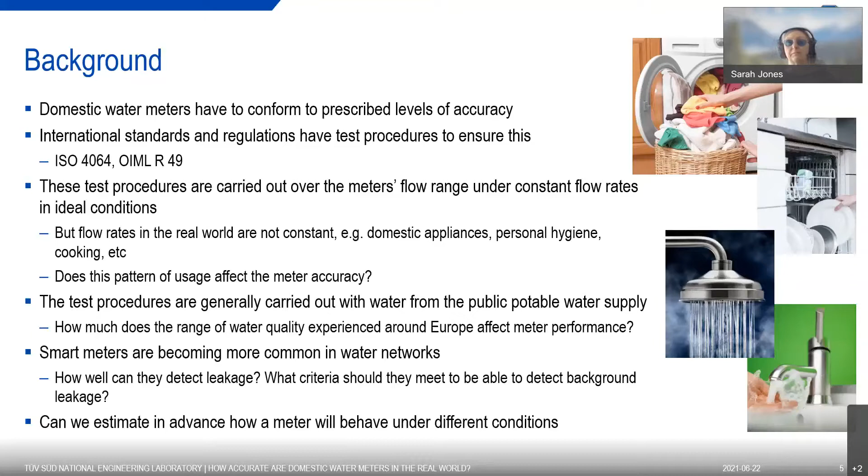To answer these questions, they set up an EMPIR-funded project, MetroWaMet, Metrology for Real-World Domestic Water Metering. The project aims at establishing a metrological infrastructure to characterize domestic water meter performance at close to real-world conditions, and not at laboratory conditions as is done presently.

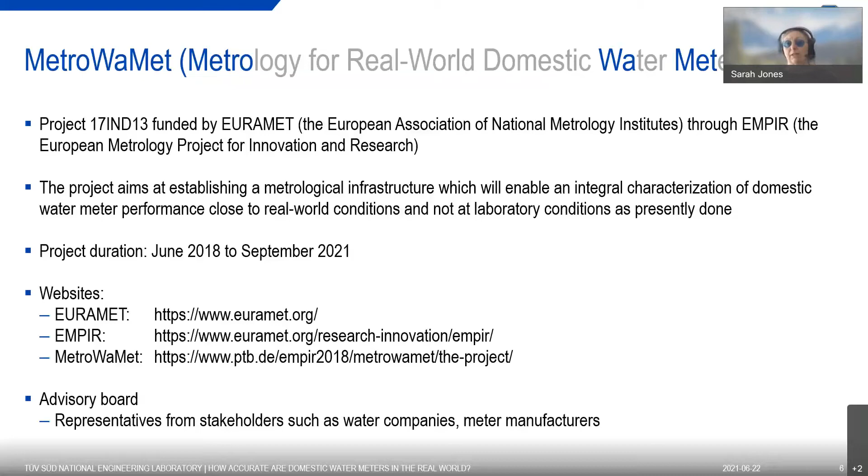The project duration is from June 2018 to September this year. It was due to finish in May, but due to COVID, it's been extended by a few months. There's details of the EMPIR and MetroWaMet websites here if you want to look at those in more detail. The project also includes an advisory board with representatives from various stakeholders, manufacturers and users.

The participants of this project come from all around Europe. There's NEL from where I work up in Scotland, PTB and DVGW in Germany, CETIAT in France, BEV-PTP in Austria, UNISA in Italy, TÜBİTAK in Turkey, CMI in the Czech Republic, DTI and Force in Denmark, VTT in Finland, and RISE in Sweden.

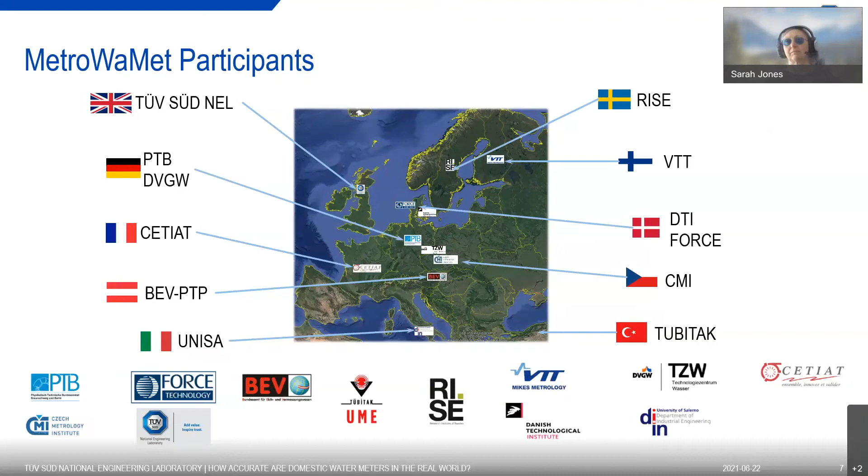The project was split into a number of work packages, which I will describe in the following sections. Work package 1 looked at whether dynamically changing flows affect meter accuracy. Experimental facilities were set up to test this at national metrology institutes and designated institutes in several countries.

A pilot study of the EURAMET interlaboratory comparison was undertaken to validate the metrological comparability of the dynamic test facilities. This was to ensure that the dynamic flow profile capability of all the dynamic test rigs was the same. To test this, a transfer standard, also called a validation module, was circulated around all the laboratories and recorded how well the facilities matched the dynamic test profiles.

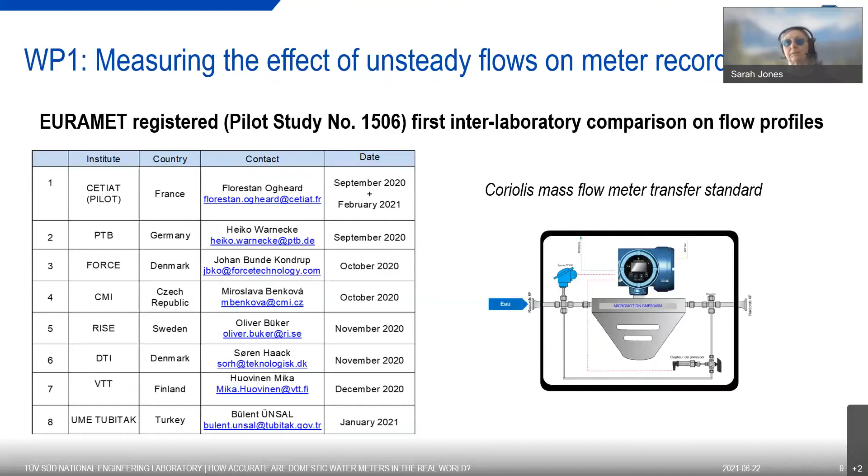This slide gives a few more details of the system. Basically, it was all in a shipping-friendly package with dedicated software that was sent around the various labs to measure the performance of the test rigs.

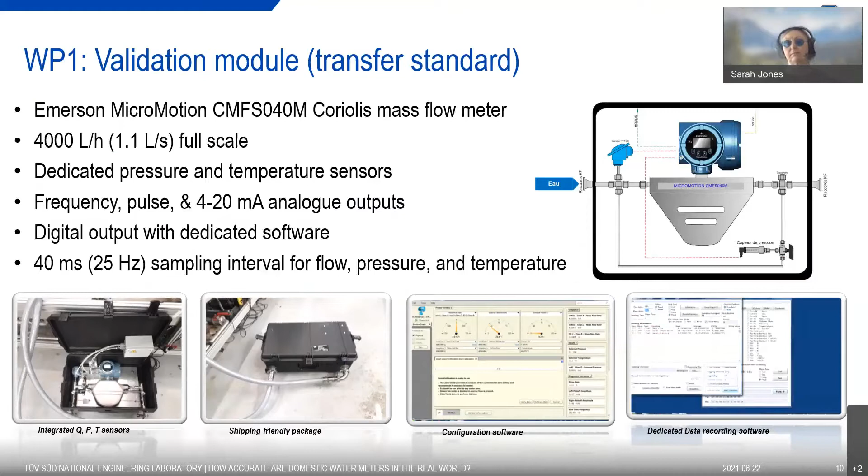The pilot study was performed with 3 flow profiles with different volumes of approximately 50, 80, and 100 litres, simulating dynamic flow load changes and flow rate range up to 1600 litres an hour, which is 1.6 meters cubed an hour, and flow durations down to 10 seconds.

The selected flow profiles were determined on the basis of previous studies of consumption data from various apartments and apartment buildings in a number of EU countries. These data were evaluated in relation to flow rates, their durations, and speed of flow changes.

The flow profiles were chosen with respect to the laboratory's capabilities, and so that the flow profiles are statistically representative of the actual water consumption in households. Each flow profile represents a different situation for which the participating laboratory had to demonstrate its capacity to handle different flow profiles.

So for profile number 1 on the left, it starts with a medium flow rate and ends with a medium flow rate. Profile 2 in the center starts high and ends medium. And flow profile 3 on the right starts with a 0 flow rate and ends with a medium flow rate.

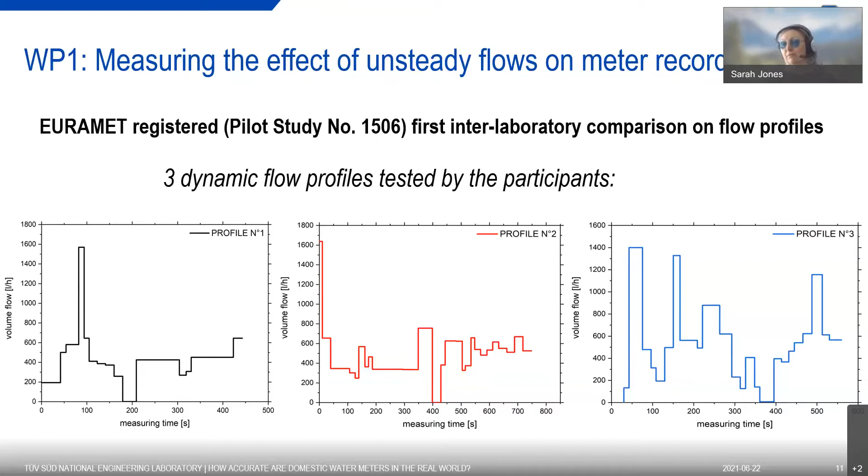So in order to match these profiles, they had to fulfill a number of requirements. That meant fast changing flow rates overall from high to low, almost instantaneous in some cases, but slightly slower for the higher flow rate changes, and with a high resolution in measuring the flows.

This unprecedented intercomparison gives the first overview of the calibration and measurement capabilities of 8 European national metrology institutes and designated institutes regarding dynamic flow measurements.

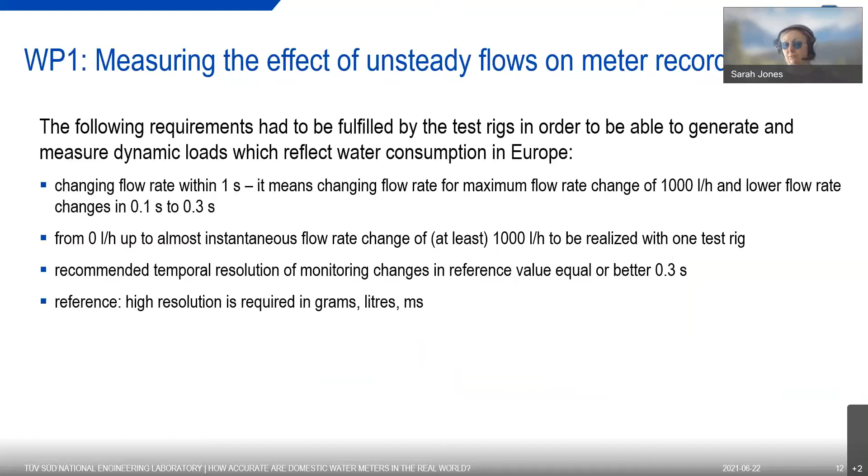All the participants had different primary standards technologies for the generation and measurement of dynamic profiles. The primary methods included gravimetric weighing, volumetric using a piston prover, and one partner used a reference flow meter.

Dynamic flow generators were used to create rapid changes in flow, and these included fast valves, critical nozzles, digital valves, and fast piston changes.

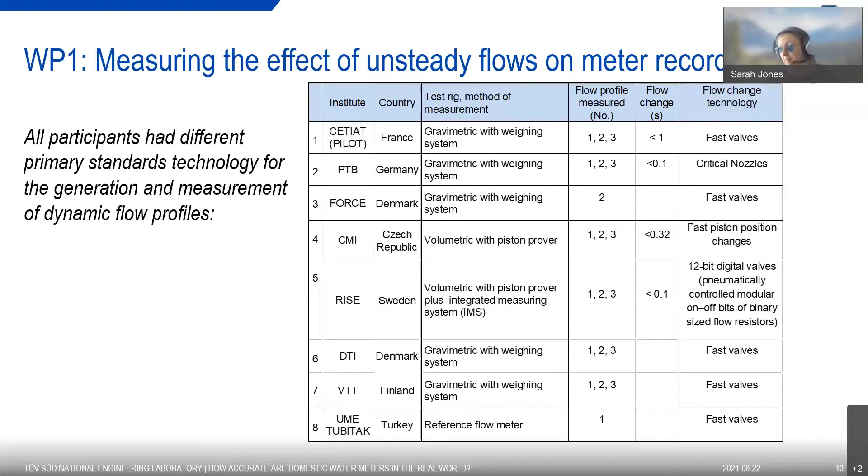A test protocol was prepared, which was followed by all the laboratories, and this shows the log sheet to be completed for each test, which was repeated at least 3 times.

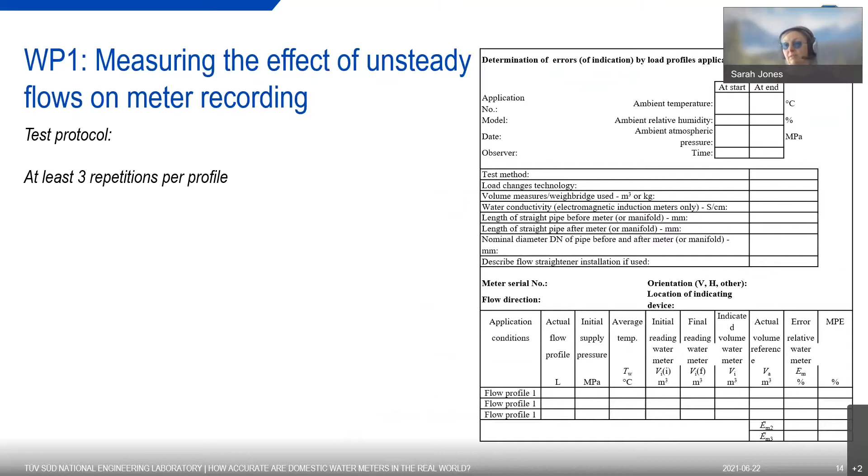The degrees of equivalence observed in this intercomparison show that the test facilities for dynamic liquid flow calibrations of the participating laboratories are in very good agreement.

Despite the fact that 3 different technologies were used to create the load changes, the relative errors for the 3 profiles agree within a range of -0.1% to +0.2%. The participating laboratories state the expanded measurement uncertainties of their test facilities as being between 0.1 and 0.4%.

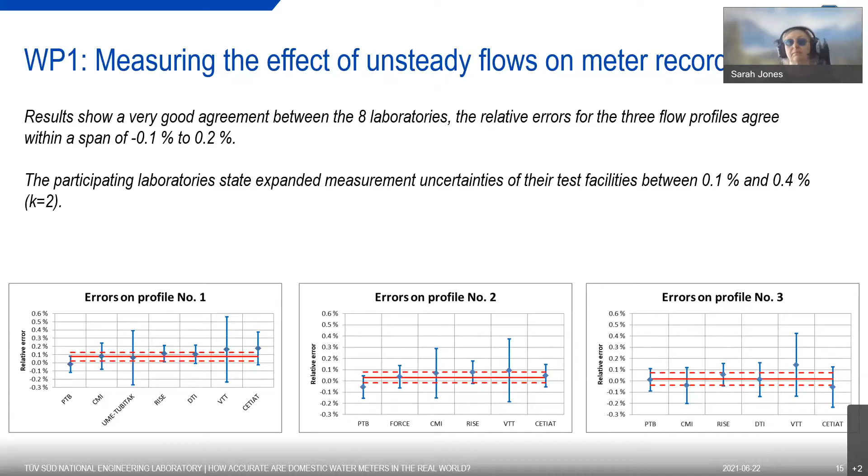With a view on future broader applications of this kind of calibration, an in-depth analysis of the profile realization using the individually measured data sets will be carried out by the end of the project.

The dynamic measurements are being compared with the results of steady state flow tests for different meters, and this graph shows an example of how the results might be presented. Further evaluations of the measurements are currently being carried out and will be presented at the workshop in September.

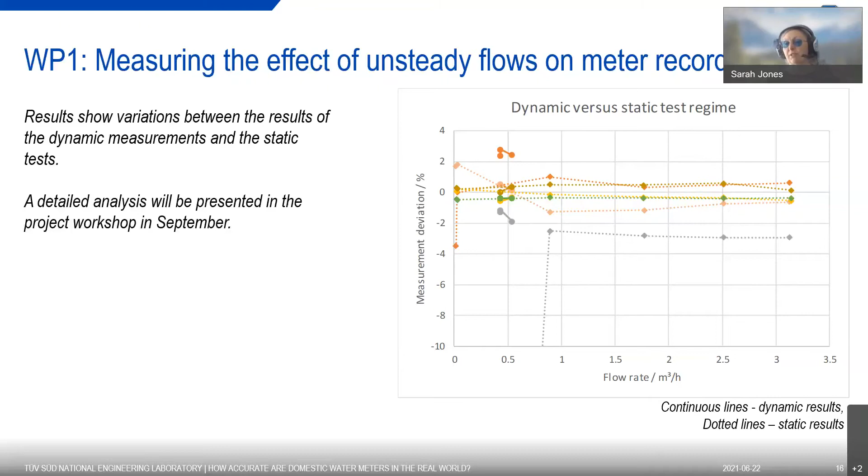Work package 2 looked at the effect of water quality on long-term meter performance.

It's known that water quality can significantly affect the measurement performance of domestic water meters, and there are a number of studies carried out in Central Europe over the last 10 years, but they didn't yield any clear correlations between meter performance and age, total recorded volume, or water quality.

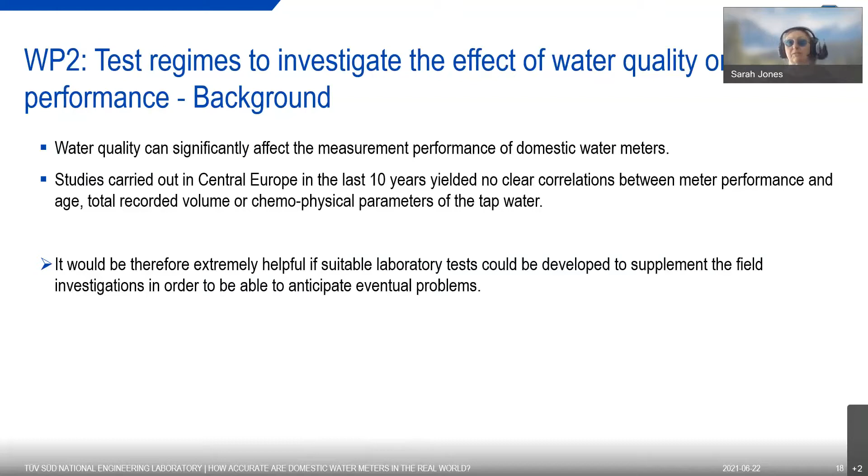So therefore, it was considered extremely helpful if laboratory tests could be developed to back up the field investigations in order to be able to anticipate eventual problems.

So what conditions is a domestic water meter exposed to? What's the total throughput, typical loads? What's the parameter ranges of tap water?

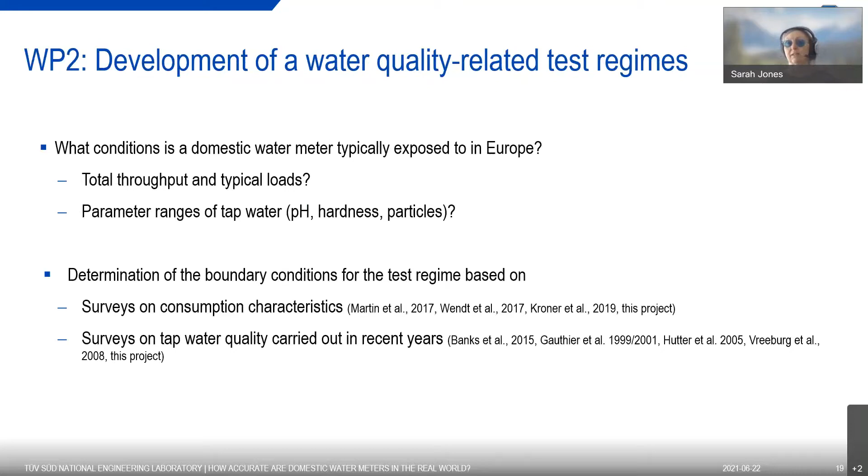The determination of the boundary conditions for the tests were based on surveys on consumption characteristics, and that's a paper in this project, and surveys on tap water quality that have been carried out recently. And again, there's another paper available.

The boundary conditions were found to be that a total throughput of 189 cubic meters in 6 years for a meter with a Q3 nominal size of 2.5 cubic meters per hour, with typical flow rates being 0.75, 0.8 cubic meters per hour. For these tests, this representative load profile on the right was repeated over 10 days until 189 cubic meters was passed.

As a comparison, the stress test from OIML R 49 is 100 hours at Q4, which is 1.25 times Q3.

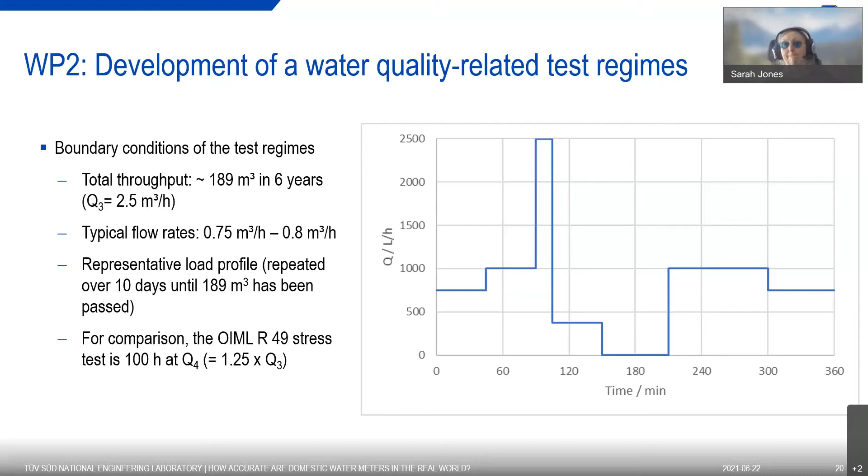Basic tests were set up to evaluate separately the effect of hardness, pH, and particles. 3 different values of these parameters were tested based on the European Water Survey.

Information on typical particle loads was difficult to find, so sizes and concentrations were selected that could potentially be experienced in networks.

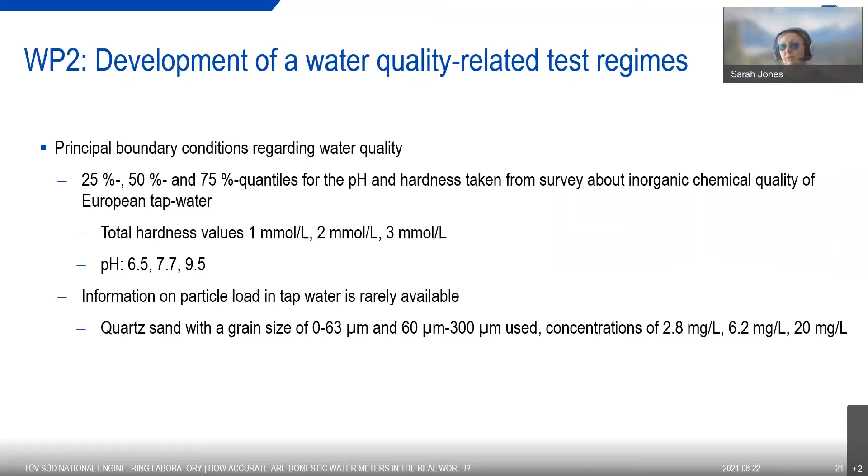Then a number of cooking recipes were set up to make up water of consistent quality and to make sure that the quality was identical across all laboratories so that the results be comparable and repeatable.

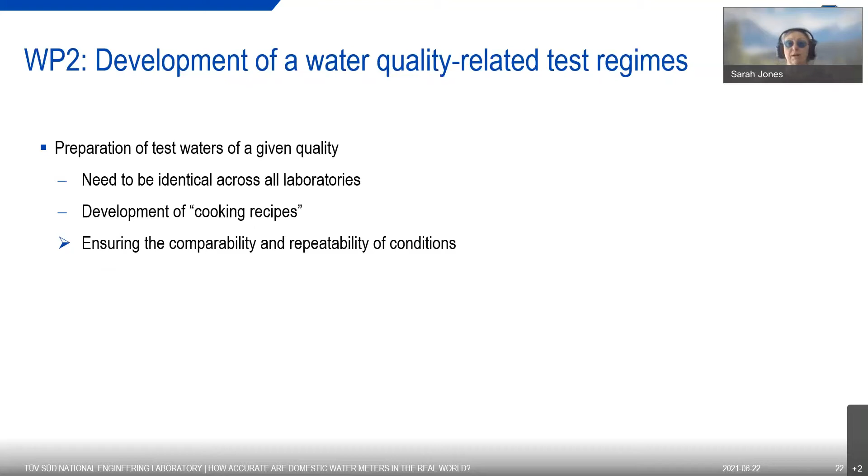The tests were carried out using the profile shown in the previous slides. Details of these test rigs were presented in the previous webinar, so I'm not going to go through them again here.

As said before, the experiment was continued until the total throughput of 189 meters cubed was reached. The pH and hardness of the test water were monitored at regular intervals, at a minimum of every 2 to 3 days, using either handheld devices or laboratory measurements.

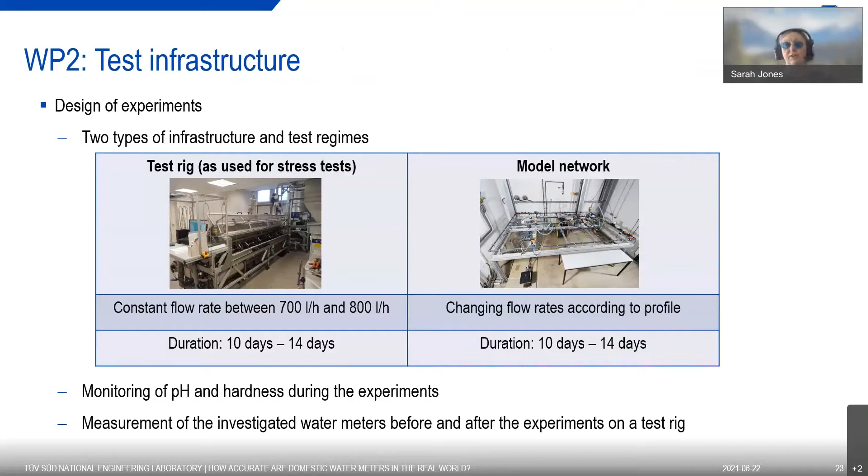In total, 187 water meters from 9 different companies were investigated, and manufacturers supplied at least 3 meters of each type. An overlap of meter types, experiments, and test regimes was ensured.

At a later stage during the test, additional experiments were undertaken on selected meters, which included a higher hardness of 6 millimoles per litre, a doubling of the experiment duration, a combination of hardness and particles, and also the OIML-R49 stress test of 100 hours at 3.125 meters cubed per hour with local tap water for comparison.

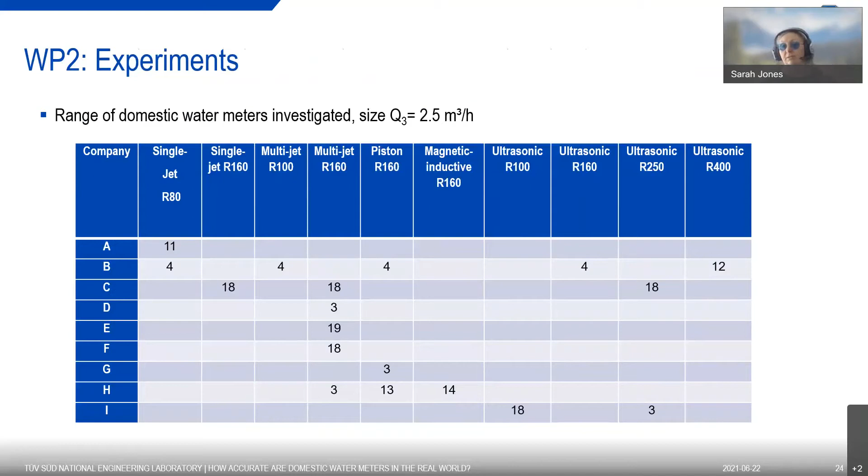So here's some results of tests on meters in mint condition. These are baseline tests carried out so that they could be compared with later experimental results. So these were the baseline tests, and it also gave an insight into the differences in measurement performance that already occur with new water meters.

These base measurements were evaluated with regard to the variability in the measurement deviation depending on the meter type, and then these were used later as a reference to determine changes in the measurement deviations depending on the water quality. The graphs show the mean and standard deviations of each point.

Mechanical meter results are shown on the left and electronic meter results on the right. The graph axes are the same, and a number of things stand out. The measurement deviations for a single meter type and company can vary considerably, as can be seen from the bars showing the standard deviations.

In general, water meters based on electronic measuring principles show smaller measurement deviations, but there are obvious exceptions, e.g. piston-based meters can have similar measurement deviations of a similar order of magnitude as ultrasonic or magnetic inductive meters. An ultrasonic meter can have larger measurement deviations than mechanical water meters.

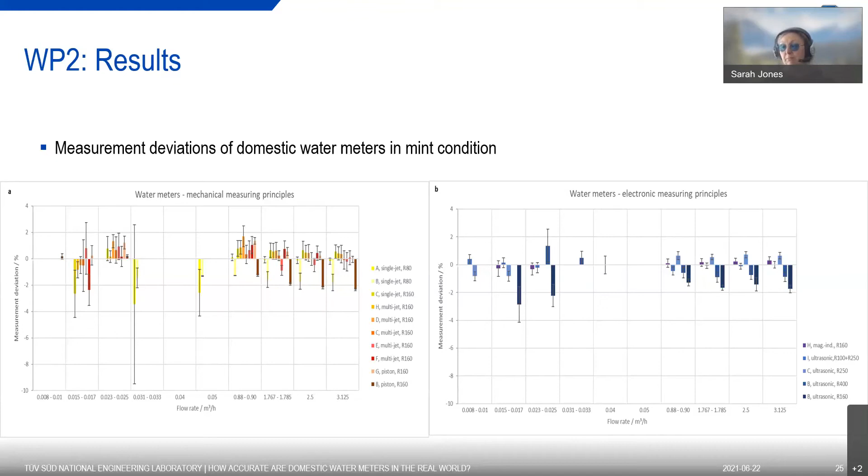This shows the difference between the measurement deviations obtained after testing compared with the individual meter in mint condition. The bars indicate standard deviations before. The yellow bars are the hardness experiments, the green bars are the pH experiments, and the grey-black bars are the particle experiments.

And these are shown divided up into the different meter types. Please note that the scales on the y-axis are slightly different, not the same for all the graphs.

As already observed for the measurements on new meters, the results for the influence of the water quality on the measurement performance of the water meters shows no clear patterns.

A lower water quality due to hardness, pH value, or particle load can cause measurement deviations in water meter performances. In many cases, the changes in the measurement deviations are in the range of up to 1%, often well below. There is no consistent change in the measurement deviations compared to the new meter measurements, i.e. no systematically increasing or decreasing deviations.

The largest effects do not necessarily occur at the lowest flow rates or the poorer water quality. Several examples were found where the maximum effects occurred at pH 7.7 and flow rates between 0.8 and 1.8 meters cubed per hour.

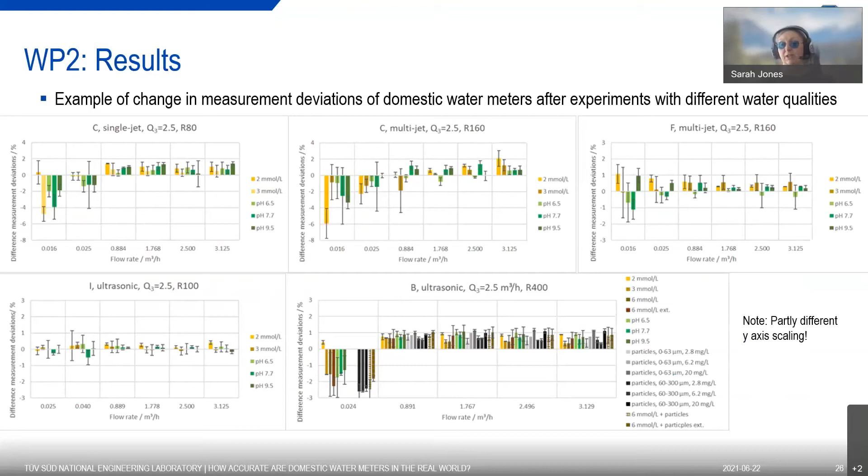So to conclude, the test regimes were feasible. The type of test regime doesn't seem to play a role. The test waters were stable during the tests.

There were indications that poorer water quality leads to stronger effects than conventional stress testing. The results show no clear trends and strongly depend on the combination of water meter type and manufacturer, and possibly the batch.

All these results were made available via a user interface accessible at the project website towards the end of the project.

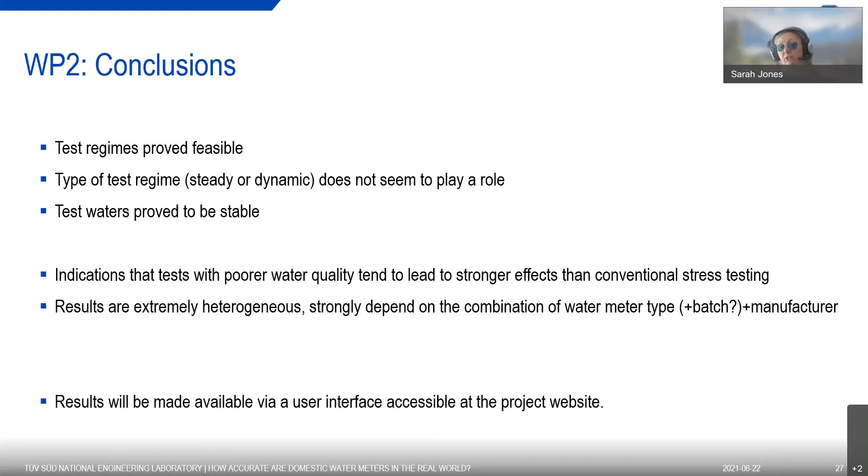Generally, the measurement performance of the meters was within the maximum permissible error, but not all, and not even all meters in mint condition complied with the MPE.

The objective of Work Package 3 was to assess meter performance in detecting leaks and low flows.

Different types of water meters perform differently at low flows, and that depends on their construction and their measuring principle, which affects both the starting flow and their dynamic performance. And the meter types have different cutoff values for low flow.

For mechanical meters with rotating wheels, they need some flow before the wheel begins to turn, whereas an ultrasonic meter does not have a mechanical part and a force to overcome before they can start measuring.

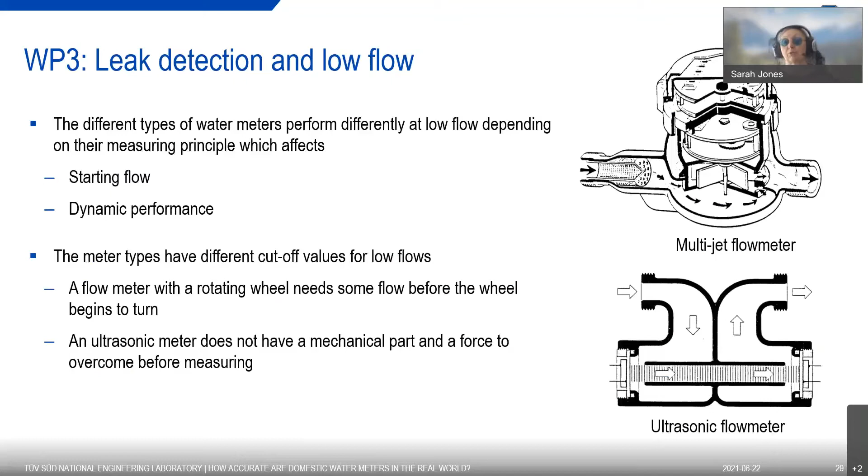The purpose of the leak detection part of the project was to look at different types of domestic flow meters' performance at low flow and for different dynamic profiles, and investigate different flow patterns, flow profiles together with leakages, develop algorithms to detect leakage, and an electronic solution to detect leakage as well.

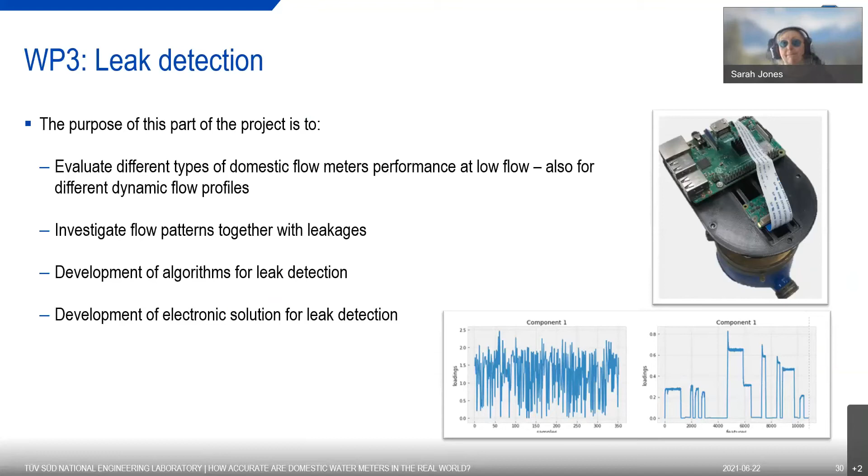Laboratory facilities were set up to simulate different leakage experiments in controlled settings, and leakages were generated by a defined opening of a needle valve, between values of 0.1 and 3 litres per hour.

As can be seen here, there are two leakage types, which are a constant drip or a gradually increasing leakage rate. And the volume of leakage was measured using a gravimetric method, i.e. with a weigh scale.

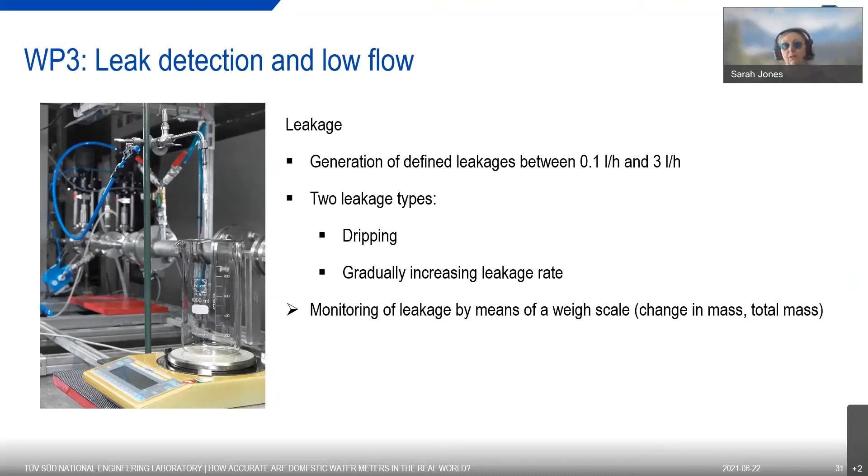Two sets of experiments were performed by testing flow meters both with and without leakage, and by superimposing leakage on a dynamic profile. For this, a Coriolis meter was used as reference for the comparison of water meters of different types.

For a leakage rate of 0.1 litres an hour, it wasn't possible to detect it visually from the data set. It would be necessary to analyse the data, e.g. by looking at differences between data sets.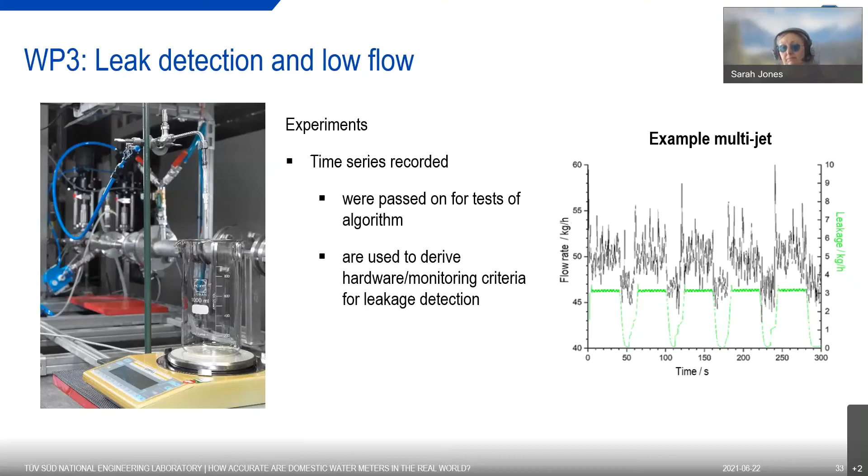Three dynamic profiles for low flow were generated using the same methodology as in Work Package 1. And for these tests, the maximum flow was set to 30 litres per hour.

The three profiles were used for an intercomparison between two labs using a transfer standard for comparison. And the transfer standard was compared against each lab's primary gravimetric reference.

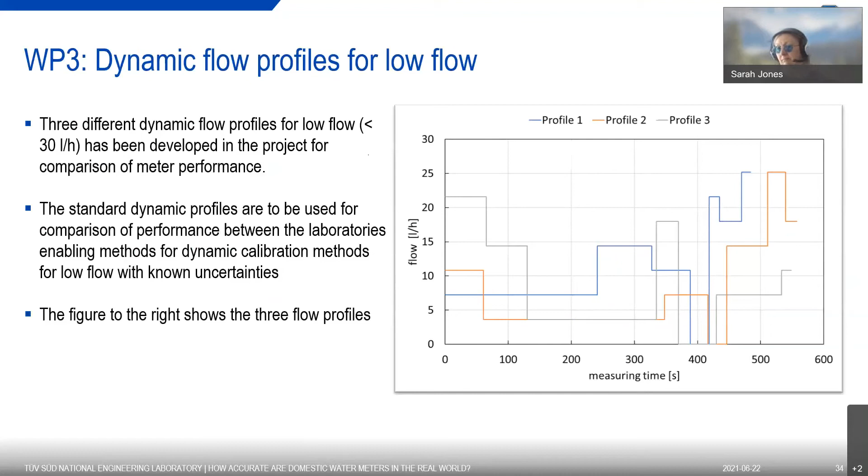The table shows the results for the intercomparison between the two labs. An E value is calculated, which shows how well the lab's results compare, with a value of less than 1 being the criterion for good agreement. As you can see, all the profiles and repetitions met this criterion and so confirmed good agreement between the labs.

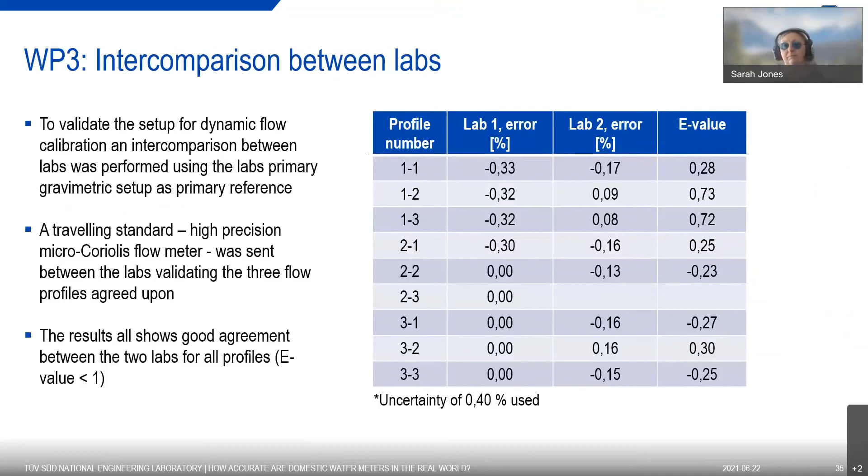After validation of the setup, the three different types of water meters were tested under the dynamic load of low flow rates: ultrasonic, multi-jet, and piston, and they were all of the same flow rating of 2.5 meters cubed per hour. Each profile was repeated 150 times, giving a total reference volume for the two profiles: Profile 1 with 207 litres and Profile 2 with 173 litres.

Unfortunately, Profile 3 had to be excluded due to hardware problems of the reference system.

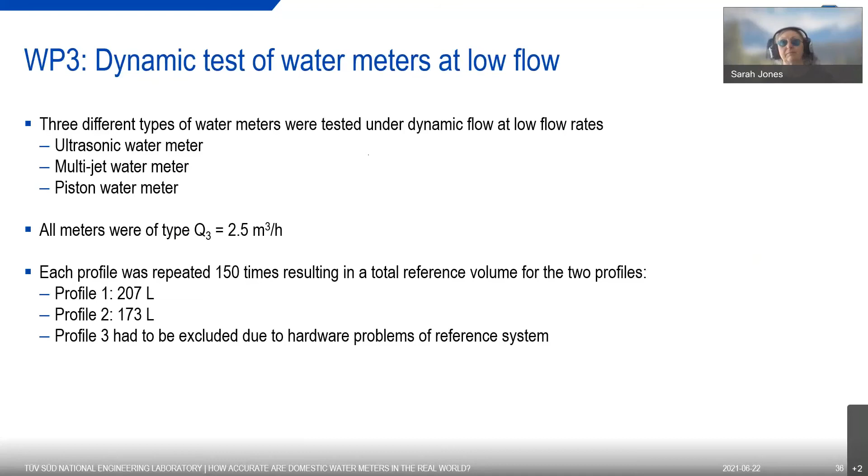And these show the results for the different meters, with the meter ID along the bottom and the percentage error on the y-axis. The ultrasonic meters are outlined in the green dotted line, and as you can see, they're very close to zero error, as are the piston meters in general.

For the multi-jet meters, they have the largest low flow cutoff value, i.e. the minimum flow at which the meters start to record, and therefore they under-register significantly at the low flows tested, as is shown on the graph.

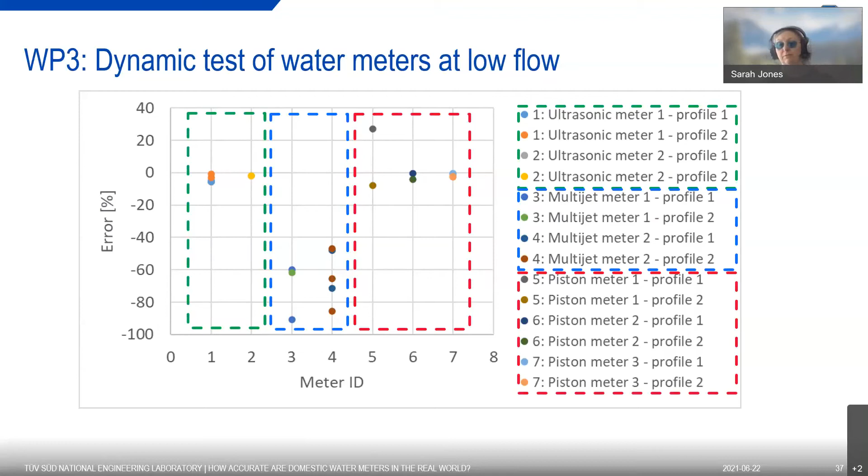So the first step in checking out the leakage was to generate some typical consumption profiles. These profiles are based on observations at a household level from a project in Germany, where consumption was measured at 1 second intervals in small and large buildings.

And the 4 profiles shown on the left are randomized sets of the following consumption types: toilet and hand washing, shower, bath, dishwasher, washing machine, and a partly opened valve, e.g. using the tap for anything else.

These were then used to generate an annual profile, so to generate 365 daily patterns. And each daily pattern is created by a randomly sliced set of the 4 consumption profiles on the left. For example, 30% of profile 1, 25% profile 2, 10% profile 3, and 35% profile 4.

To make it more realistic, some peak water demands, spikes, were added to the data. And finally, towards the end of the year, a slowly increasing leakage flow was added, which could be a small pipe burst that gets larger over time.

And then in the end, you get a nearly realistic yearly consumption profile of a household, seen here on the right, by overplotting all 365 days.

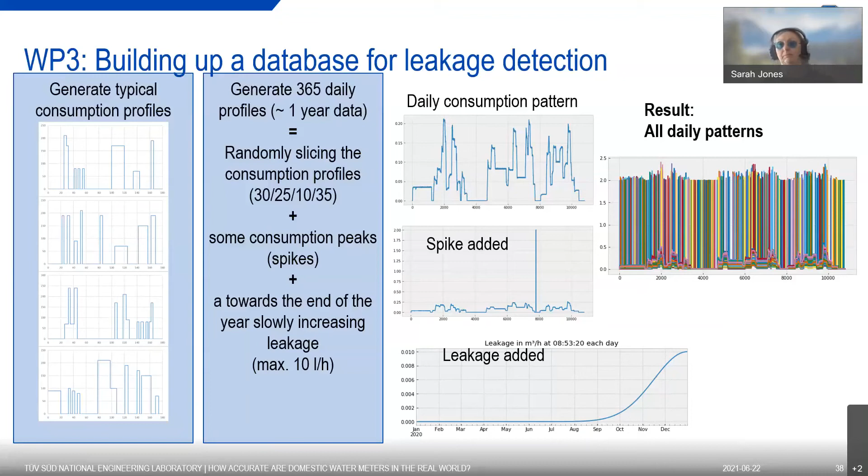The algorithm used to detect leakage comes from the water loss analysis in large-scale water distribution networks. In these networks, you estimate the overall water loss by carrying out a water balance on the water meters in the network and subtracting other legitimate metered and unmetered use to give a value for unaccounted for water, i.e. leakage.

This multivariate approach was downscaled to a univariate approach, i.e. one household, one water meter. And it basically consists of 2 major approaches.

The first approach is the assessment of recurring states in the data, so pattern recognition techniques, non-negative matrix factorization, were used to reduce the variability of data to a few recurring patterns. And the second approach was to try to forecast each day by its pattern with linear or nonlinear regression models.

The deviations between forecasted and real data should therefore be considered a loss, e.g. leakage.

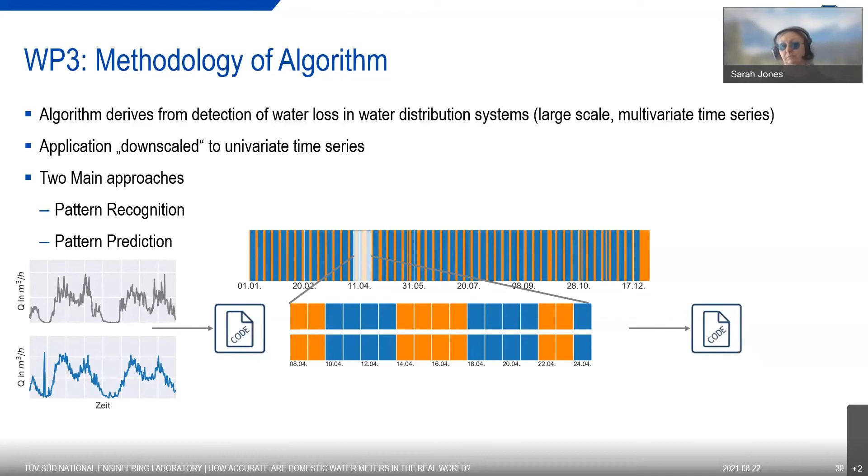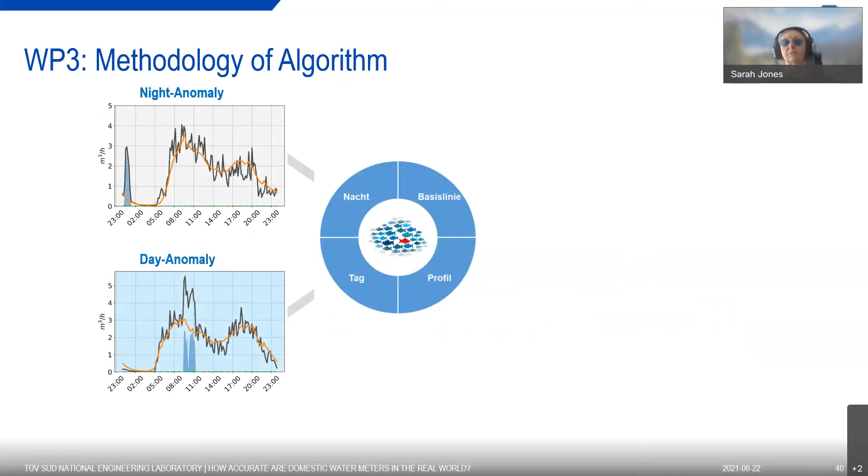So the methodology is to look at an anomaly during the night, i.e. a spike, an anomaly during the day, another spike superimposed on the profile, a baseline anomaly, so leakage, so where the whole profile is lifted by the leakage amount, and an anomaly of the profile where it no longer matches the normal expected domestic consumption profile.

And finally, the algorithm is capable of classifying and quantifying different occurrences of water loss. For our study, it's the upper right anomaly, the leakage, which is the interesting one.

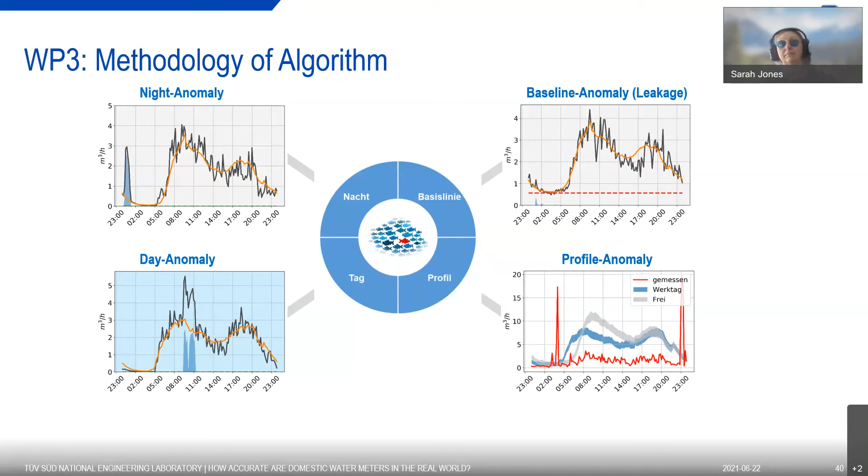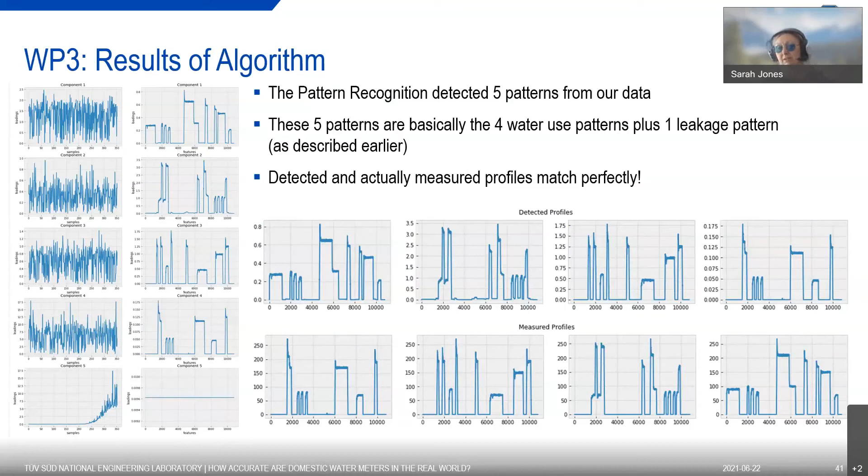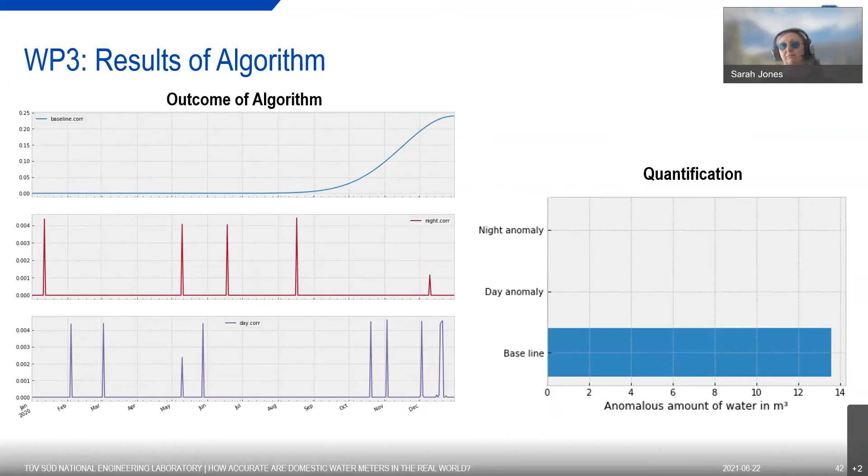Some hardware was also developed for leak detection. The platform is based on a camera and image-based analysis of small rotations of the numbers or pointer on the water meter mechanical readout, and this is analyzed using a Raspberry Pi.

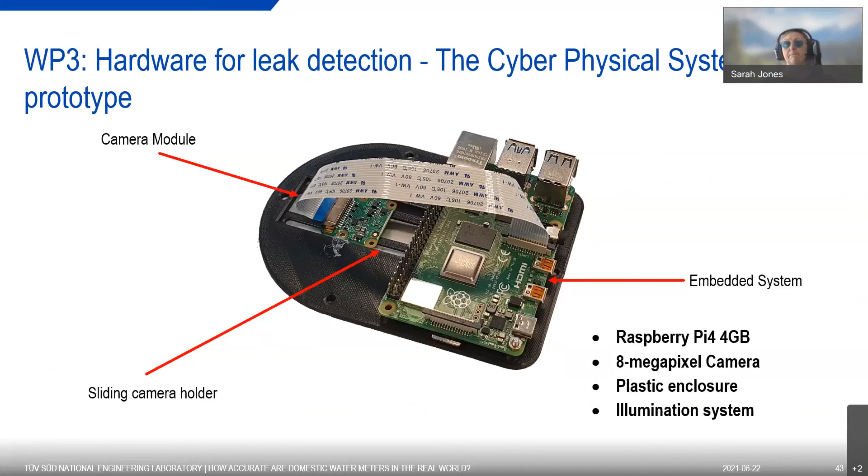The hardware module fits on top of the meter, and the camera can be positioned to see the water meter register.

And it includes an LED-based lighting system to illuminate the display for the camera.

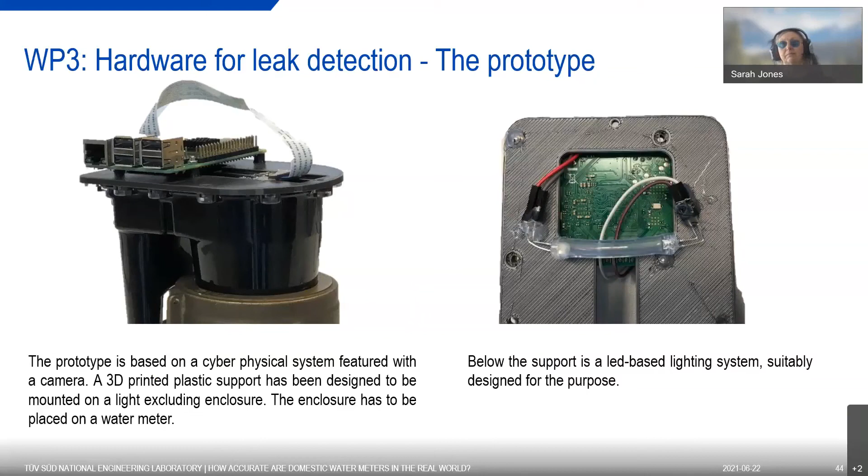The image detection is based on correlation analysis, where two adjacent images are compared. The distance of movement of the dial can be evaluated, thereby enabling the hardware platform to detect slow movement of the dial on the water meter register.

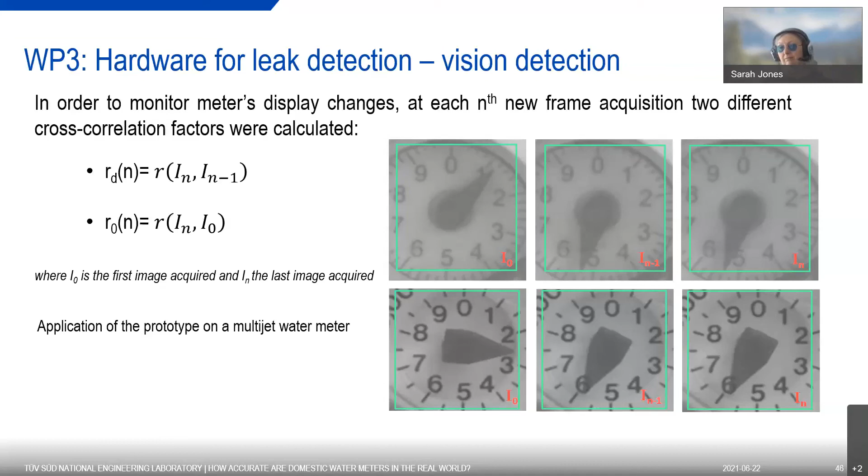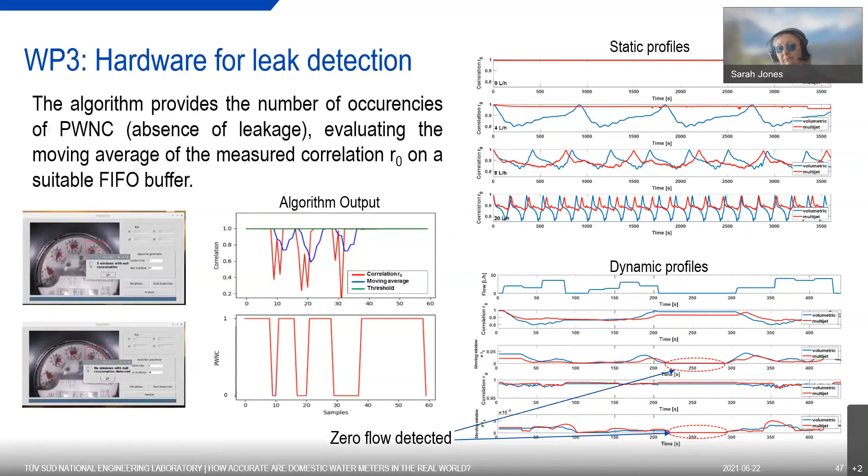At the top right, the static profiles show the output of a multi-jet meter in red and a volumetric meter in blue for different flows. The dynamic profiles show graphs of flow, the two correlations, and their respective moving windows. The final section covers details of the workshop mentioned earlier and the publications produced during the project.

There's going to be a 2-day MetroWaMet workshop on the 15th and 16th of September at PTB in Germany. This is planned to be face-to-face. Obviously, we can't promise anything with the current COVID situation, because this will give much more scope for discussing results with the researchers and so on. Whether this will be possible or not will be decided closer to the time.

Everyone is welcome to attend, and the detailed results of the project will be available by then and will be presented. To register for this event, please go to the project website, select information and communication from the tabs, and then news and events from the drop-down list.

You can also, if it's possible, from the slides which will be sent, click that direct link, which will take you straight to the registration page.

There are also some new recommendations which are now available to download from the website, dealing with how to acquire consumption profiles, household consumption profiles, including guidelines for equipment, timescales, and sampling rates.